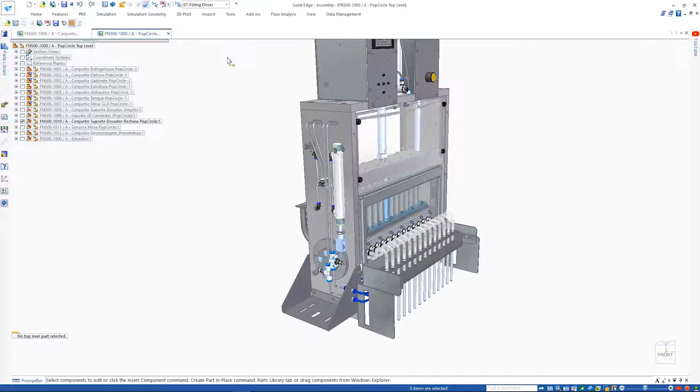Solid Edge 2021 provides the speed you need to get the most out of your entire engineering process, maximizing productivity while reducing costs. Solid Edge 2021 includes an artificial intelligence-based assistant in its user interface to predict the next commands you will need based on what it is you are doing and where you are in a design. The new adaptive UI is right at your fingertips, ready when you need that next command.

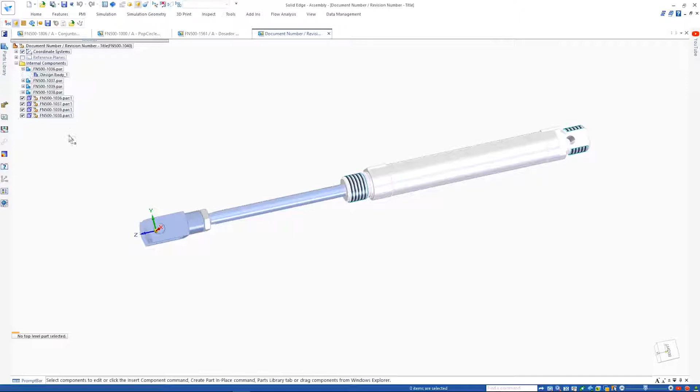It's common practice for suppliers to provide a 3D file of purchased items, such as this piston assembly. Using the new Internal Components option, all separate parts are contained within one single assembly file, with no parts written to disk. This enables faster import times, especially on larger data sets.

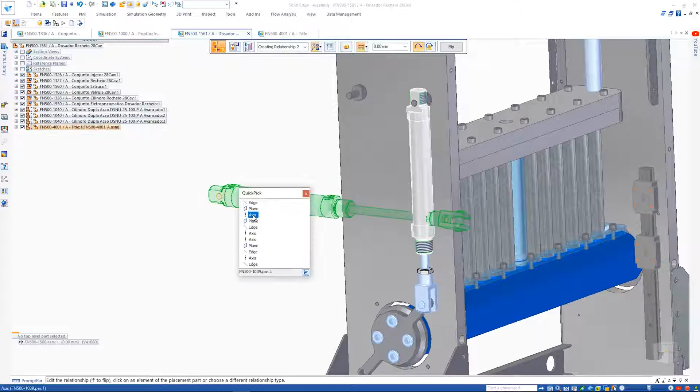Even though these parts are all internal, we can still analyze mechanisms and then assemble the item in a way it would work if it were a regular assembly. Assembly relationship creation and many other operations such as measurement can be performed on inactive parts. This provides increased performance and lower consumption of system memory. Here we see the correct operation of the piston assembly with its internal components.

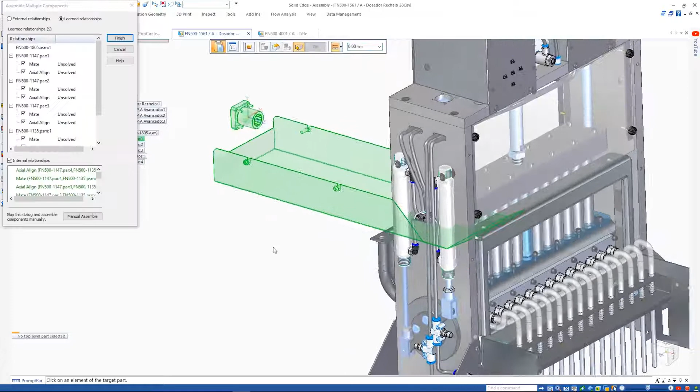Reusing designs is easier too. Now when copying and pasting multiple parts and assemblies between designs, existing assembly relationships are automatically captured and reused in the target assembly. A step-by-step process guides you through the operations to add the external relationships required to fully position the parts. All internal relationships come along for the ride. This significantly reduces the time for these operations.

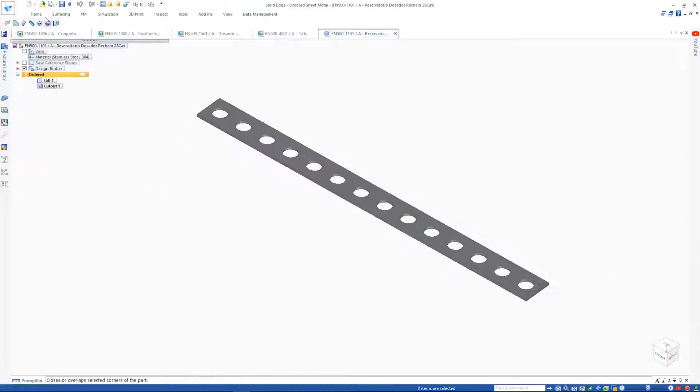A new multi-edge flange command speeds the process for designing sheet metal parts. Multiple edges can be selected at the same time, angles can be defined, and miters automatically added. It's as simple as picking the edges and then pushing or pulling.

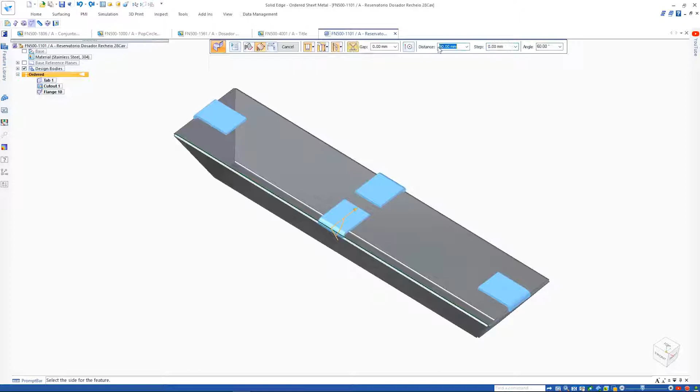In addition, partial or centered flanges can be defined, and trim options make light work of tasks that would normally require multiple operations, even with offset or gap distances if required. These sheet metal enhancements, along with many others, increase productivity and efficiency by being able to design parts faster and easier. A new Decal command makes it quick and easy to add labels and images to parts.

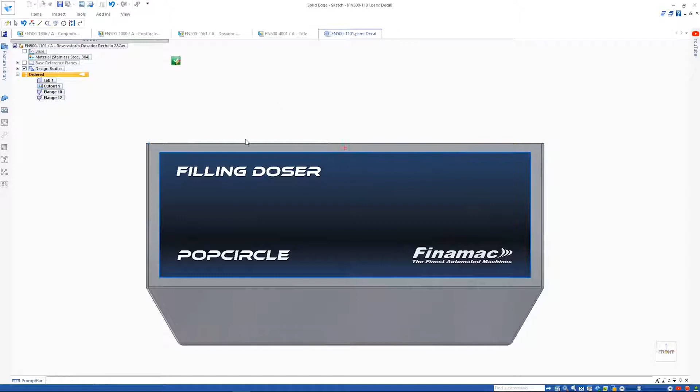Simply select the desired image, define the desired size, and position it accurately using regular sketch relationships and dimensions. The decal can span multiple faces as we see here. However, changing the position of it is as simple as modifying the dimensions or relationships.

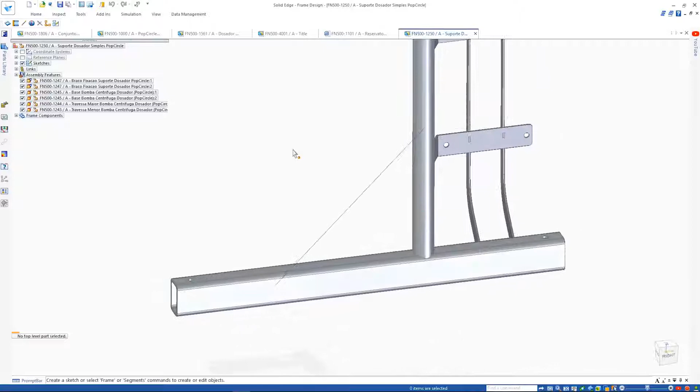Solid Edge 2021 also sees enhancements in frame design. Here we'll place a cross frame which has coping applied so that it matches the circular cross-section of the vertical frame. Now we can specify a weld gap between two frames. This is especially important in generating an accurate cut length of welded frames in our parts lists.

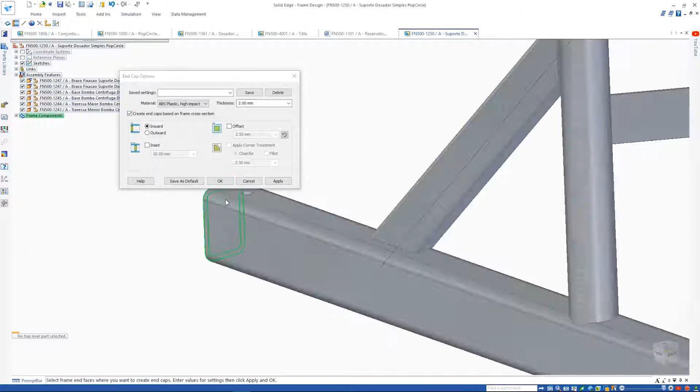The new end caps command allows the quick definition of these types of parts within a frame. This single command provides a wide range of options. Simply select the frame cross-section, choose the material, and specify the type. Choose from different types like inward or outward, and even define offsets or have chamfered corners. The end caps are reflected in the bill of materials, eliminating additional work for the user.

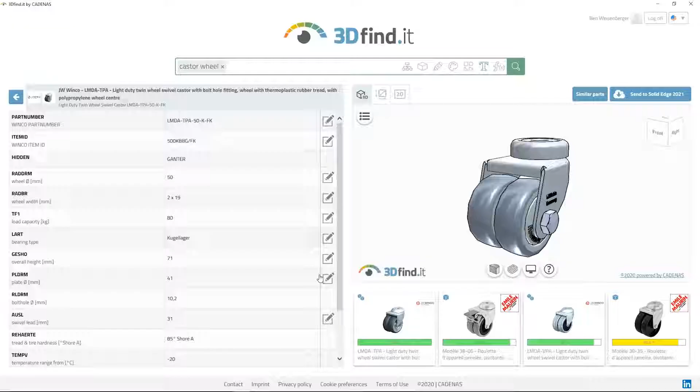A new online parts catalog makes finding and reusing supplier parts a breeze. There are various ways of finding models, even by using shape search if necessary. We can view 3D, 2D, and sectional views, or even compare two models to visualize variations. Once selected, a single click places the part into the assembly.

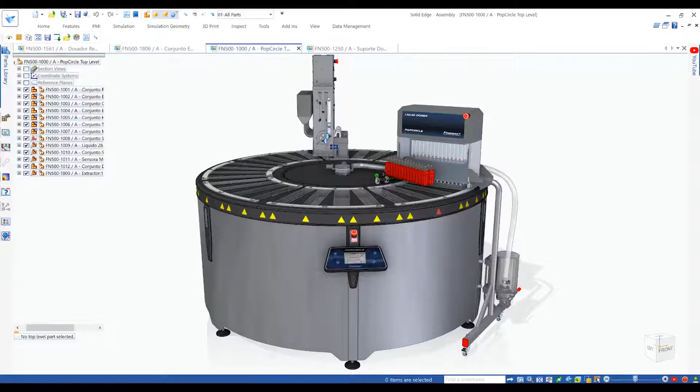Solid Edge 2021 continues to employ cutting-edge improvements to help you realize productivity gains in the tools you use most often. To learn more about Solid Edge, visit solidedge.siemens.com.